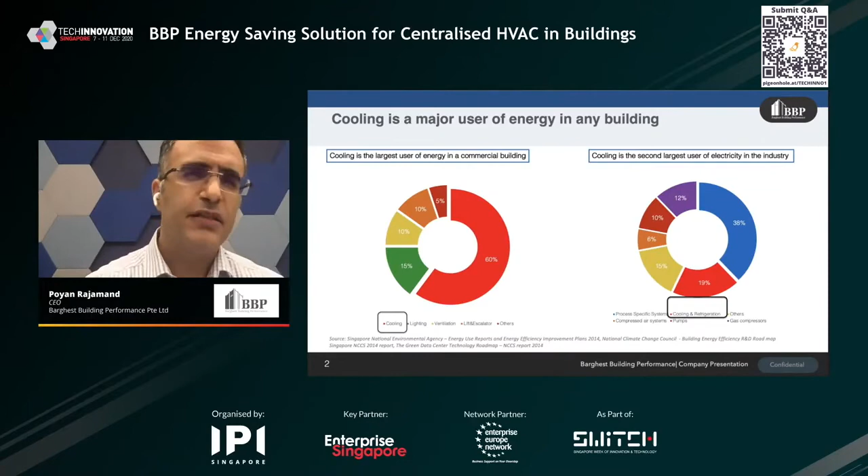So if it is such a large portion of energy, what can we do about it? What BBP does is add a layer of intelligence to existing systems. It's a software hardware package that we can retrofit to any existing air conditioning system, which takes sensor data and transforms it into precise controls of existing equipment in order to operate them with up to 40% less energy consumption.

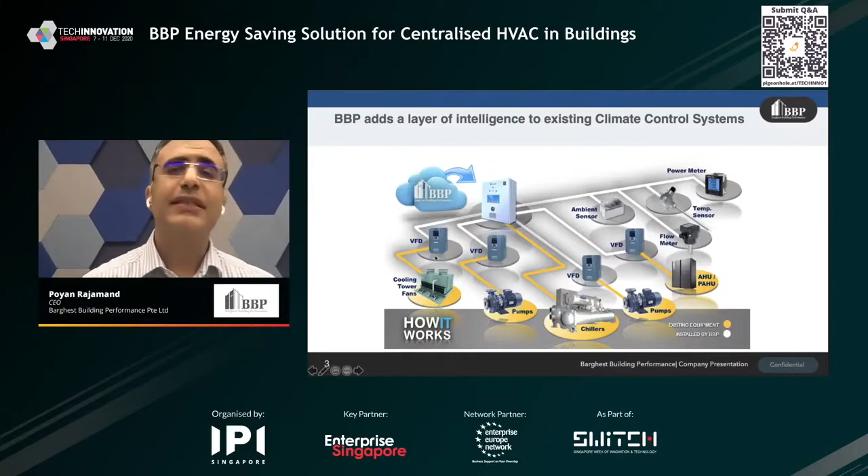And while doing that, we generate data. The data we generate, amongst others, shows us exactly how much energy we have saved, and as such we can quantify the amount of energy. Because of that, we can offer our solution without any upfront cost to our customers, taking a portion of savings as payment. And again, we have an independent third party to verify the amount of savings. So our customers do not need to commit to any CapEx or OpEx investment, but just pay us a portion of the savings that they get.

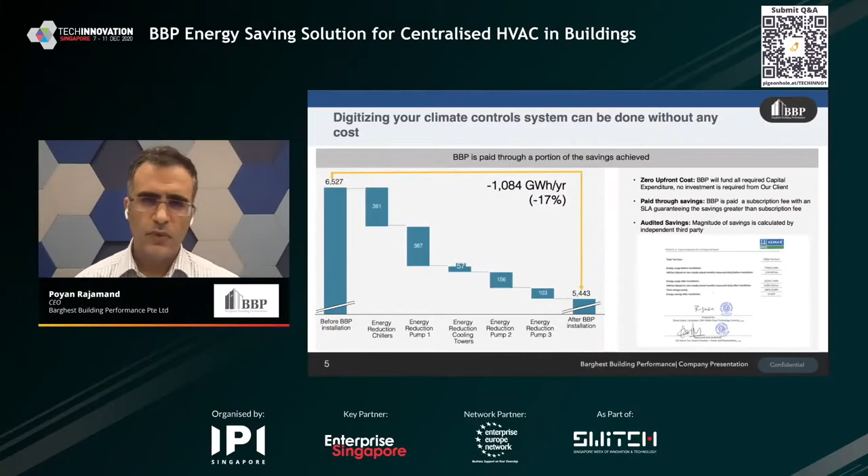But what do we do with all that data that we gather? We have been working with CapitaLand and IMDA on driving edge-enabled analytics around four pain points. One was anomaly detection. Now our algorithms can automatically look at historical data, compare it with how your plant is functioning right now, and detect whether there are small deviations on how it should be operating.

The second one is fault detection. If our anomaly detection detects something, our pattern recognition algorithm can automatically identify the source of the error. The third one is false alarm suppression, meaning if there is an error, our algorithms look through the data to know if this is a true error, or if there's a change that has created a false alarm. And lastly, an equipment lifecycle analysis, meaning we look at existing equipment and can detect slow deterioration of performance in order to detect maintenance issues.

This is all built on a cloud-based platform where we can take data from all different sources. It is built on a high-performance GPU-accelerated platform with Kinetica. And again, we can offer it without any upfront cost in most cases to our customers.

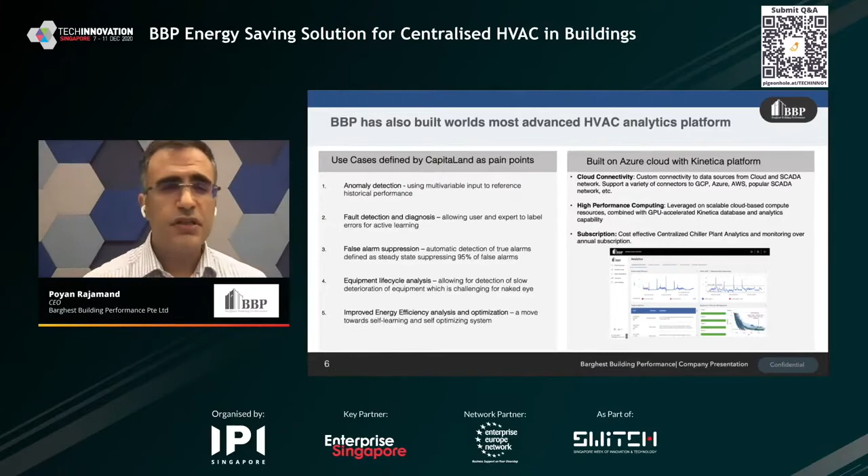Now, when it comes to the maintenance side, what we do for the energy efficiency side is our platform automatically looks for improvement opportunities. Effectively, the algorithms right now look at the historical set points across a number of parameters, both internal and external. It creates insights and throws out new rules in case more energy efficiency can be improved. And by doing that, we can push our customers towards more and more energy saving over time.

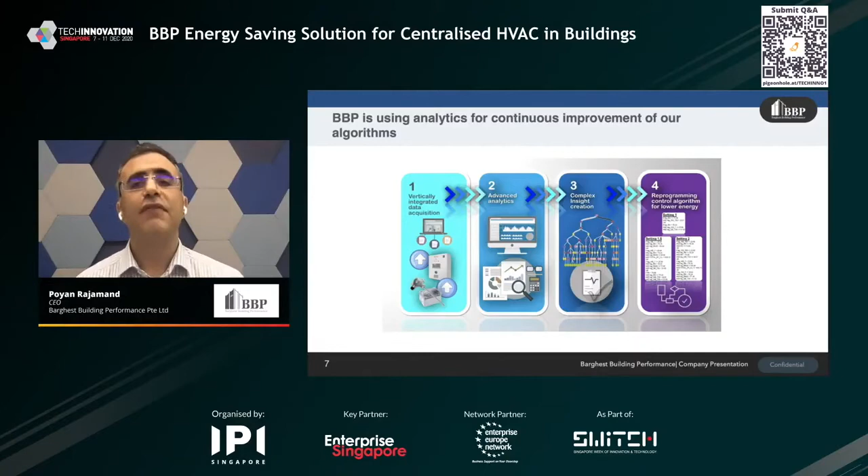Now, we are right now the largest company doing this regionally. We are serving customers across retail space, office space, hospitality, and industrial space. We have presence in 10 countries across APAC, in Southeast Asia, India, China, Korea, etc. And we have raised about $45 million from KKR's Impact Fund, that allows us to invest in continuous development of analytics, as well as being a partner for large, sophisticated customers like the one in this conference.

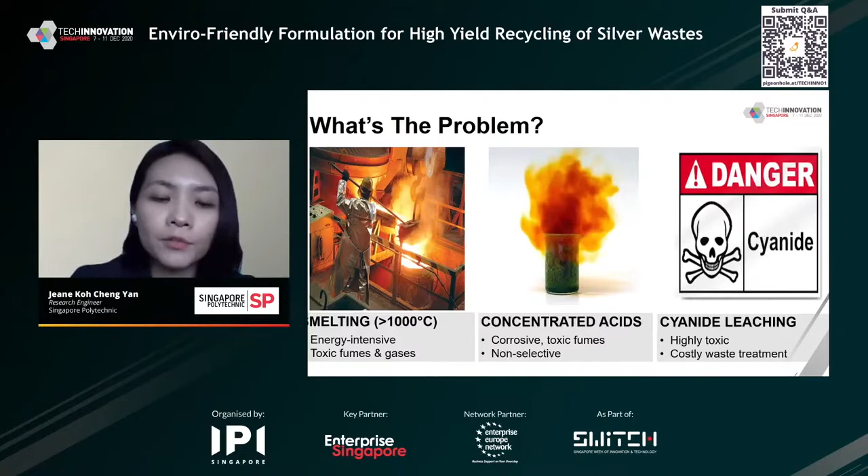So to address these problems, we have developed a leaching formulation for extracting silver from solid waste that is free of cyanide and strong acids, hence making it non-fuming. This formulation works at mild temperatures ranging from room temperature to 40 degrees Celsius, to extract over 97% of silver present on waste materials, up to 10 or even 15 grams per liter of silver in the bath.

Our formulation is selective, or targeted towards extracting silver, with silver forming at least 85% of all the metals being extracted. On top of that, the components in our formulation can be easily adjusted to suit different types of samples and performance requirements. High recovery of high purity silver from the bath can be accomplished using conventional methods such as precipitation and reduction.

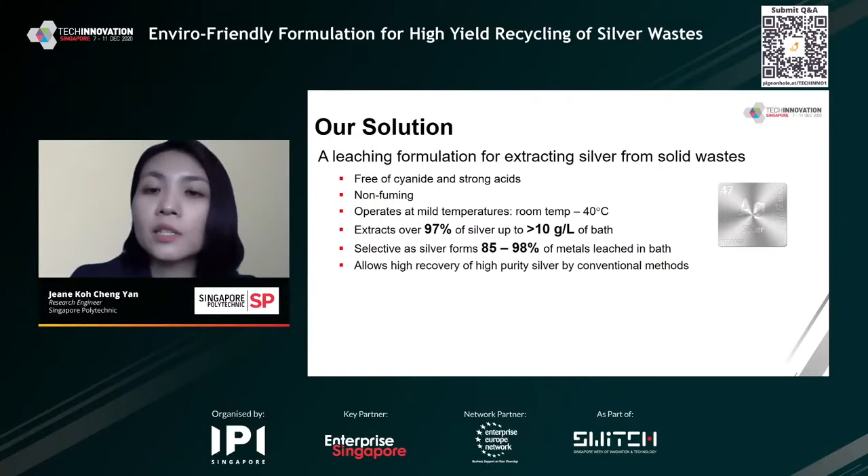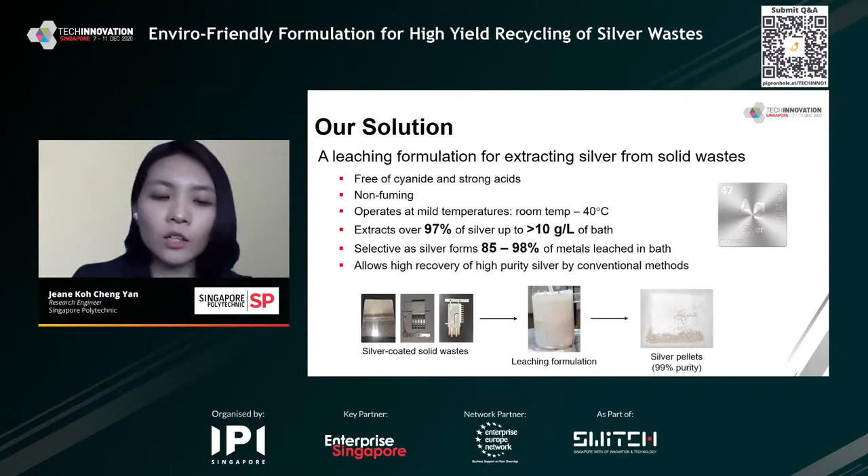So basically, with our formulation, silver recycling from waste becomes a mild and safe process of simply immersing to extract silver and later precipitating to obtain silver pellets with purity as high as 99%.

Comparing our technology to conventional technologies such as concentrated acids and cyanide mentioned earlier, our formulation has the advantages of being fast, having a high extraction rate, being selective or targeted towards silver extraction, and being relatively safe and easy to handle due to its low level of hazard.

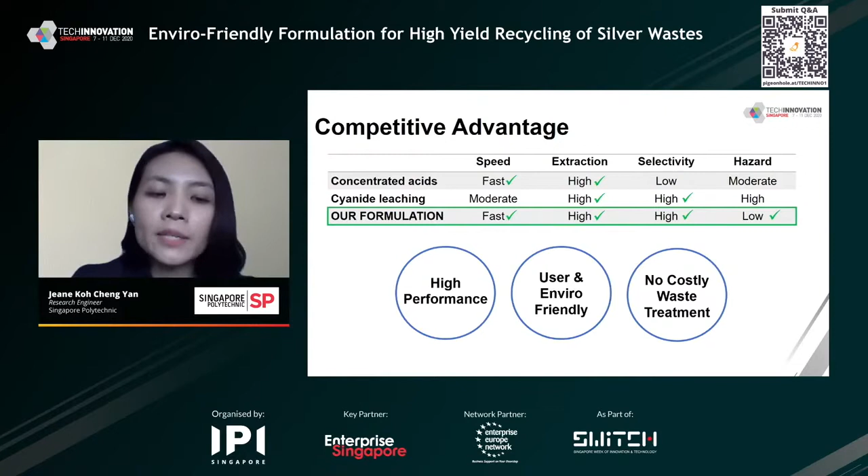So this translates to a high performance silver extraction method that is more user and environmentally friendly and removes the need for any costly wastewater treatment.

Our formulation can be directly employed in existing operation lines for extraction of silver from the ever-increasing electronic waste and also industrial waste such as solar panels, X-ray films, and silver catalysts.

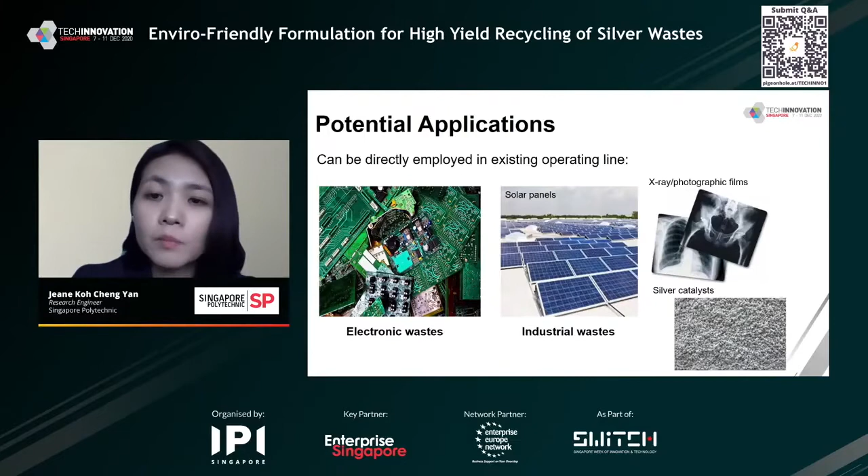At this stage, the team has completed the developmental work and lab validation, and we are seeking industry partners to test bed the formulation. We are open to licensing the technology to interested partners.

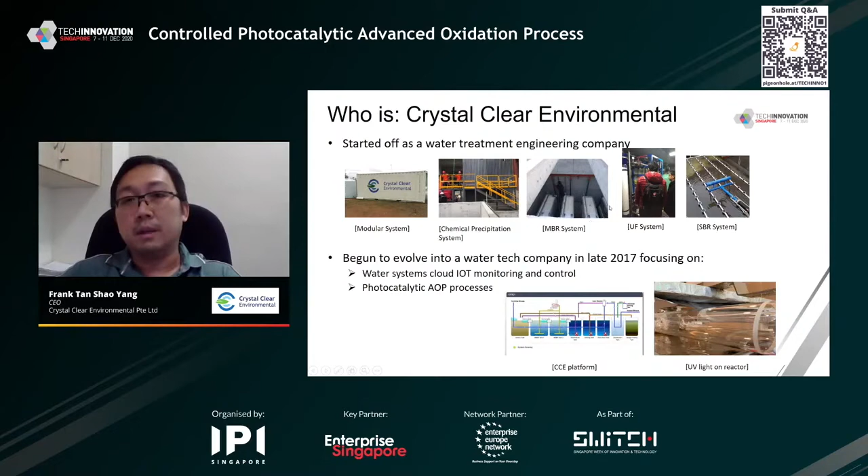Our solution tackles this type of wastewater in high concentration, prominently from petrochemical wastewater. Conventional methods that we are competing against will be through incineration. Incineration, as we know, is energy intensive to burn water, and of course it's carbon heavy emission, and not the most economical solution.

So the exact people or companies that we're addressing will be petrochemical firms. They have economic concerns to actually do the right thing, to do proper waste disposal, but economic concerns, such as in Singapore, are actually quite high.

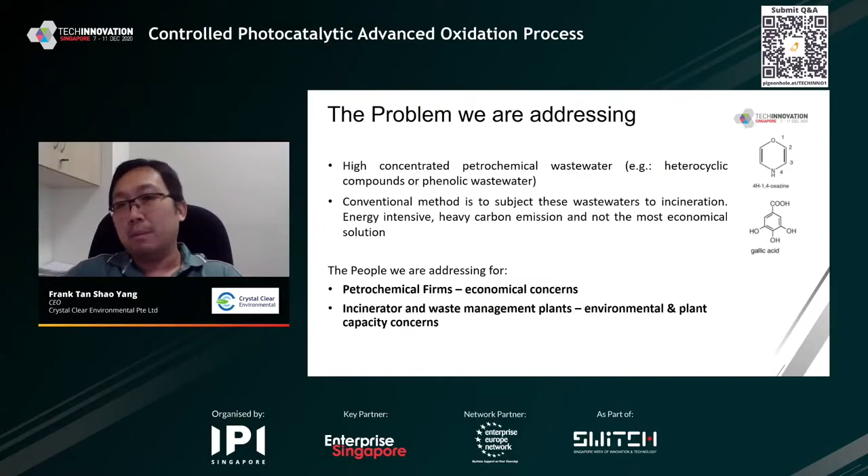Now, the second group we are addressing will be incinerators and waste management plants. Their concern will be environmental impact and plant capacity concerns. If they were to use our technology, overall capacity increases because they burn less water. So indirectly, or directly, this increases their business by enabling them to burn more water using the current capacity.

Now, just to give you a few examples of other AOP solutions in the market, wet air oxidation is one type of AOP technology.

Basically, as the name implies, it uses very high temperatures, maybe up to 300 degrees and up to 100 times the normal atmospheric pressure, using an oxygen catalyst to try to oxidize everything in the wastewater. The advantage is you can handle very high levels of pollutants, but there's a problem of very expensive OPEX.

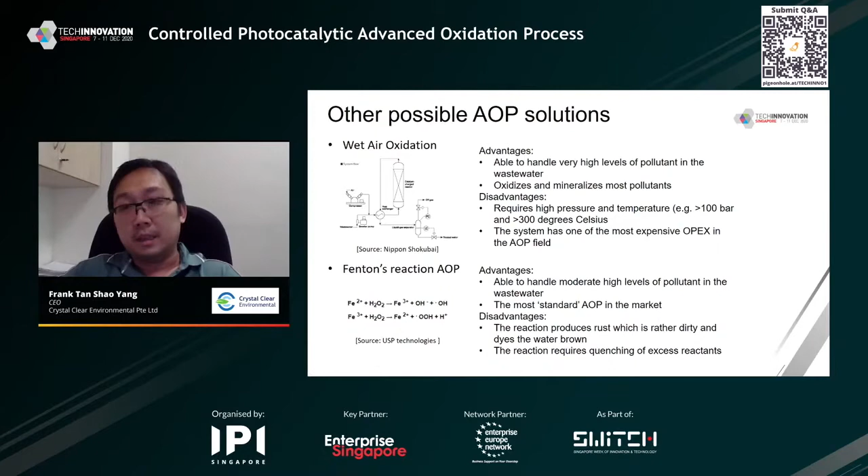Next one will be Fenton's reaction. The advantage of this is it's very available, common in the market, but however, it's very dirty as it uses iron and rust. Our solution is actually much more elegant.

We call ourselves a photocatalytic AOP technology, but it works in tandem with our IoT technology. In this way, we are able to control the oxidation. We are able to force chemicals into solid waste, and from there we remove it, not by oxidizing it to nothing, but actually removing it as a solid waste. Our technology does not use any dangerous or costly chemicals such as peroxide or ozone, and is definitely the cheapest AOP technology around.

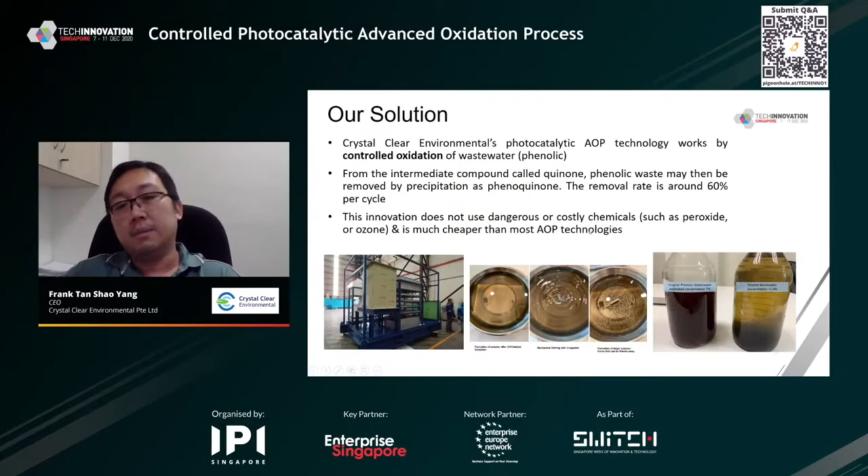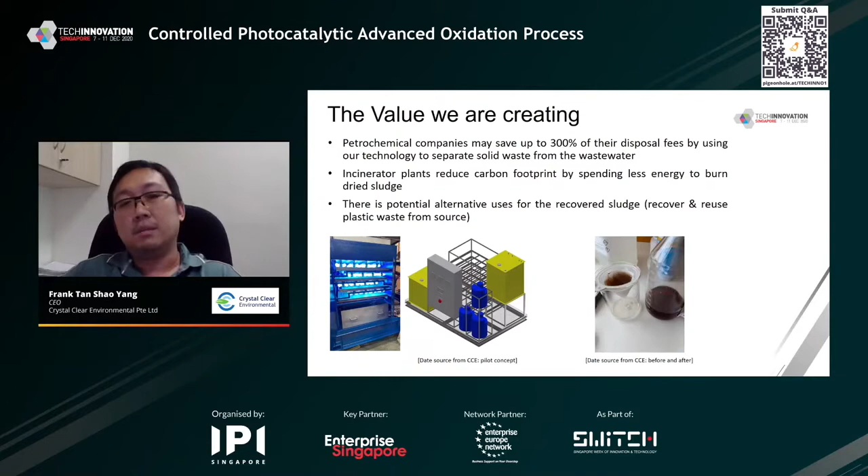Now, the value that we are creating, in short, is most of these petrochemical companies can save up to 300% of their waste disposal fee using our technology. Incinerator plants now will be able to reduce carbon footprint, and there are always potential alternatives to use this sludge that we recovered.

Now, ways to collaborate: we are looking more for beachhead and early market adopters, as we are at a stage of having pilot plants already. So Crystal Clear would like to find more beachhead opportunities for our new technology, partners to work hand in hand with other potential areas such as pharmaceutical or even textile. Lastly, we'll be interested to collaborate on this technology or use other pollutants or sludge repurposes.

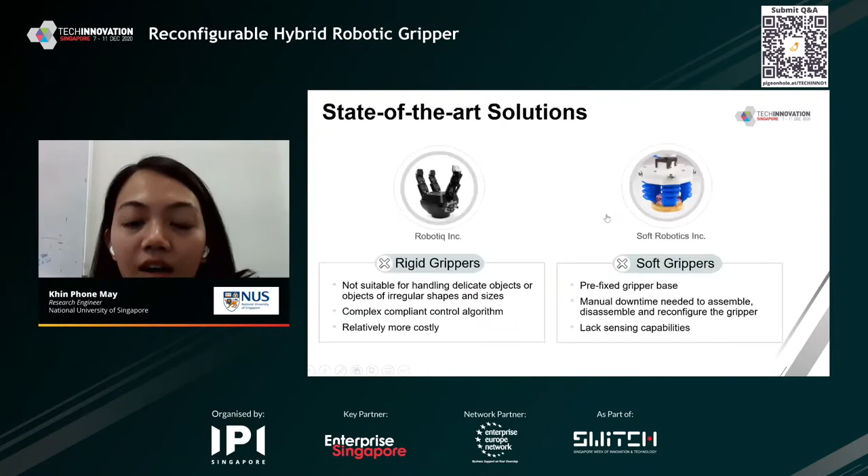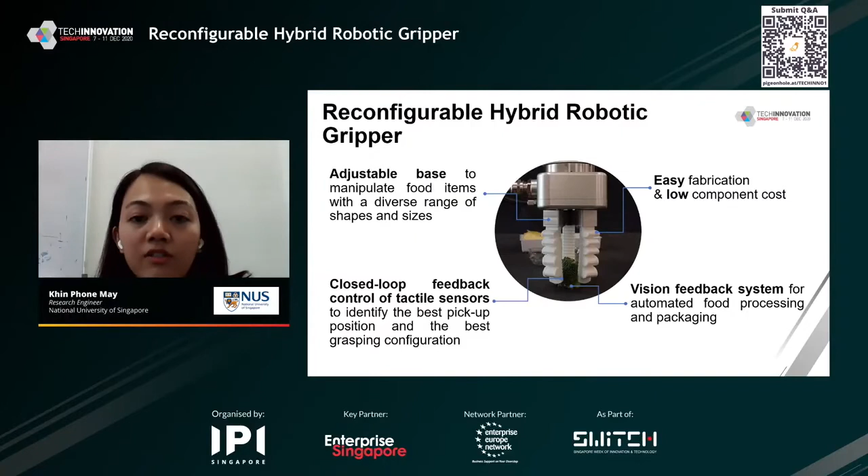So our team has come up with a reconfigurable hybrid gripper solution. It has soft fingers for compliant grasping mechanism, but it also has an adjustable base so that the user can auto-reconfigure the gripper with a touch of a button. We have also tested it with a feedback system from vision and force sensing to best get the optimal grasping configuration for any items that we are grasping.

So let's give you a brief run through. Here is our gripper mounted on an industrial robotic arm, and it's tasked to pick and place food items to pack into different trays. Using vision, once the object is detected, the gripper will adjust itself to get the best finger positions to effectively pick these items without dropping them and into the trays.

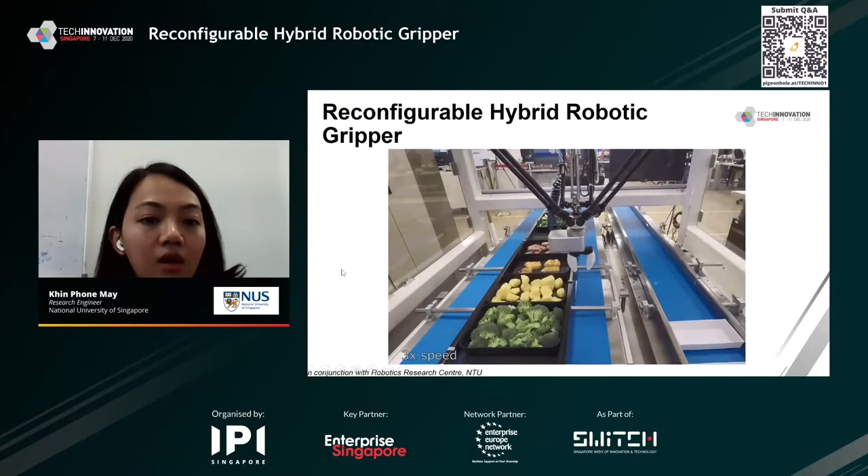Our preliminary testing has shown that the gripper currently spends about 18 seconds to pack one tray with menu items like potatoes, sausages, broccoli, and omelette. This is of course with the feedback of vision systems, and we have recorded about 85% success rate in packing these items with minimal food damage.

In addition, the gripper is able to successfully handle delicate items such as tofu, pudding, fruits, and tarts without damaging or crushing these food items.

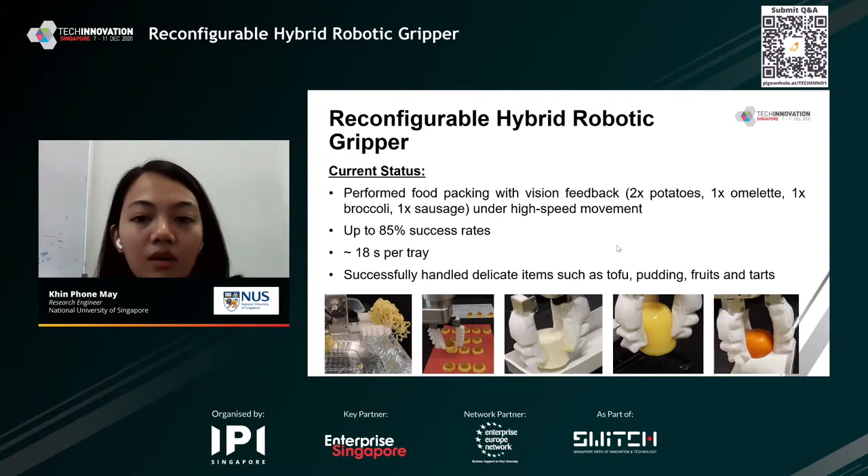The potential application is that because of the small workspace and versatile grasping configurations, this gripper can potentially be used in agriculture, particularly for urban farming projects. It can also be used in sorting and picking in F&B industrial lines. We can also implement this gripper as service robots in hospitals, and it can be used in advanced manufacturing industries for handling delicate items such as glassware.

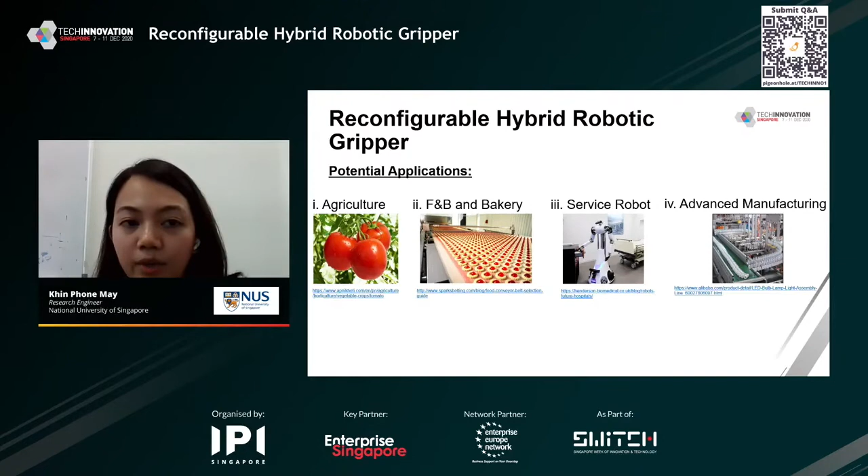Our potential collaborators are F&B industries, manufacturing industries, e-commerce, and universities or research institutes. We hope to further collaborate with potential industrial partners so that we can design and improve our closed-loop software systems, and further improve our AI systems to deliver customized grasping solutions to our partners. Thank you.

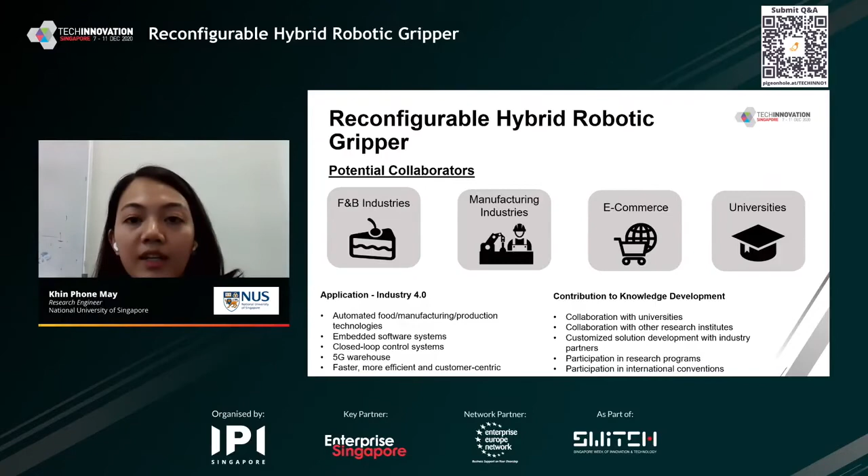Good afternoon, I'm Seng from Arete M. I would like to present how private cellular mobile solutions can empower unmanned platforms like drones and Industry 4.0 applications. We are a Singaporean company with business licenses allowing us to deploy telecom infrastructure and operate private mobile networks. We are also on track to be an MVNO with a local telco.

As an Infocomm solution platform provider, we use private LTE and 5G network solutions with dedicated spectrum for mission and business critical applications, such as control and command of unmanned platforms including drones, USV, UGV, etc., as well as high accuracy positioning and timing required for Industry 4.0 operations.

Our solution provides guaranteed low latency, high reliability, and total cybersecurity isolation and protection. We are also first in the world to carry LTE 5G signals in TV white space channels for expanded spectrum options.

We have an experienced management team, including Dr. Tang, who was CEO of a listed company in Singapore, and Mr. Goh, who was the Deputy Commissioner of Singapore Police Force.

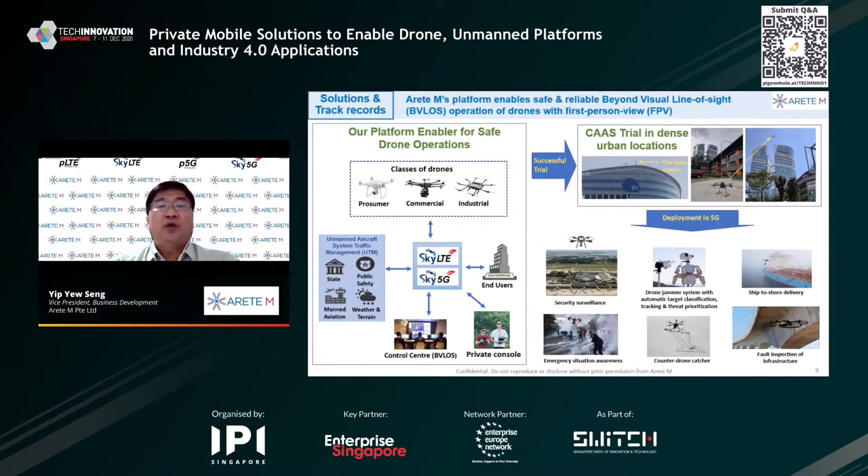We have successfully deployed our network to control drones in dense urban environments in Singapore, with several other drone deployments in the pipeline. We have also successfully worked with a government agency to control USV, which is an unmanned boat, and are exploring with partners for other use scenarios.

Our solution has enabled trunking push-to-video instantaneous live video communications for critical coordinations in shipyards.

Our strategy now is to build first-mover innovations and references in Singapore and move on with our platforms to the region. We are now raising Series B funding for 2021 for expanded innovation and product offering, regionalization, and acquisition of more spectrum resources. We are seeking investors and partners for this effort. Thank you very much for your attention.